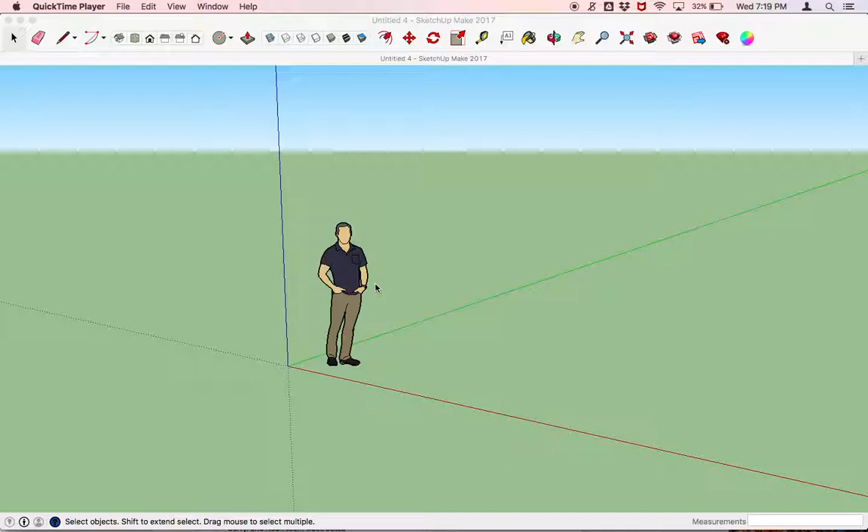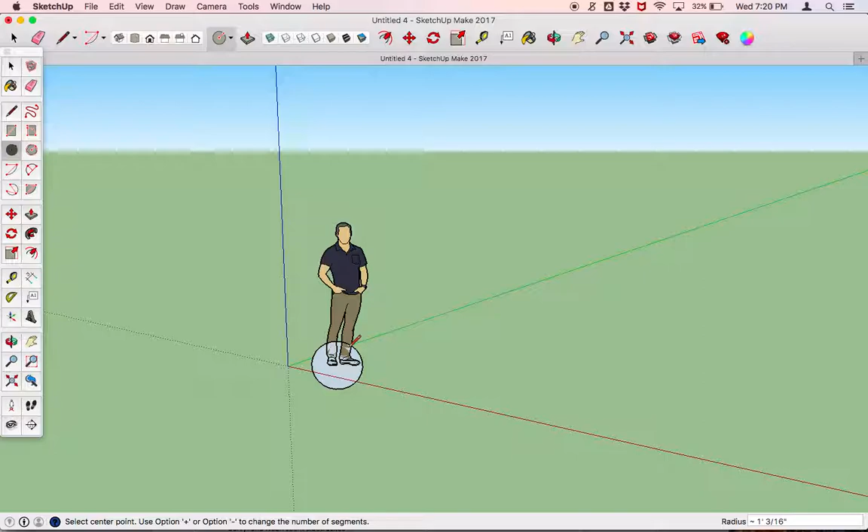To start, I'm going to press the C button to get the circle tool going. And we want to create this vertically, so I'm just going to click here vertically. And what you'll notice is that it gives you a radius down at the bottom right. And if we're thinking about the size of your project, you probably want the maximum radius to be about 5 inches. I'm just making random guesses here. And you'll see that that's pretty small. So I'm just actually going to select this away, and I'm just going to zoom way in on this.

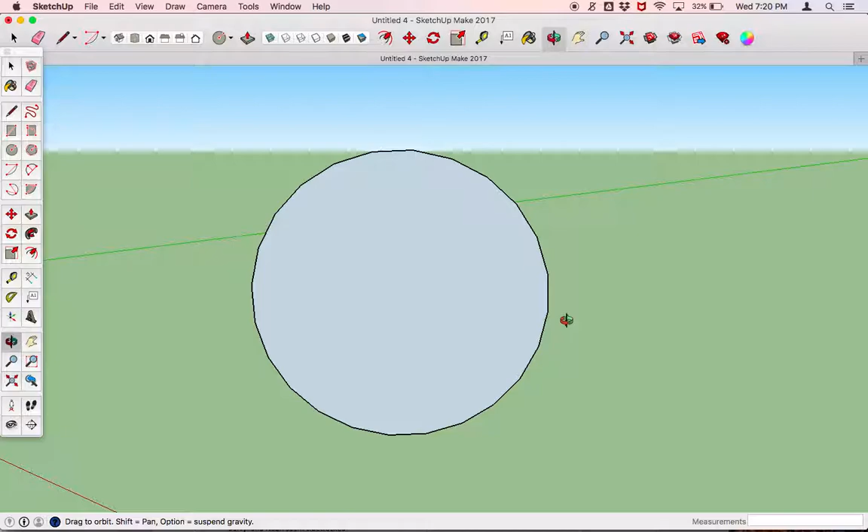So now we got this circle, and I want to push or pull it out a little bit. So let me orbit just a tad so that we can kind of see what we're doing. And I'm going to press the push-pull, and I'm going to start to pull it out here a certain amount. Now we don't want it too large. I'm thinking probably somewhere around 1/2 an inch is probably the most thickness that we want. We'll eventually duplicate this, but for now we'll just work on one of them.

Now you might remember that we use something called the offset tool, which is the F button. F as in Frank. We're going to push right here, just click one time. And the outer edge, I want it to be real thin, like a rail, basically. And so let's do 0.25 inches. You might have different dimensions already for this, but if I just call out that, you'll see what I get. And so you can augment those as you wish.

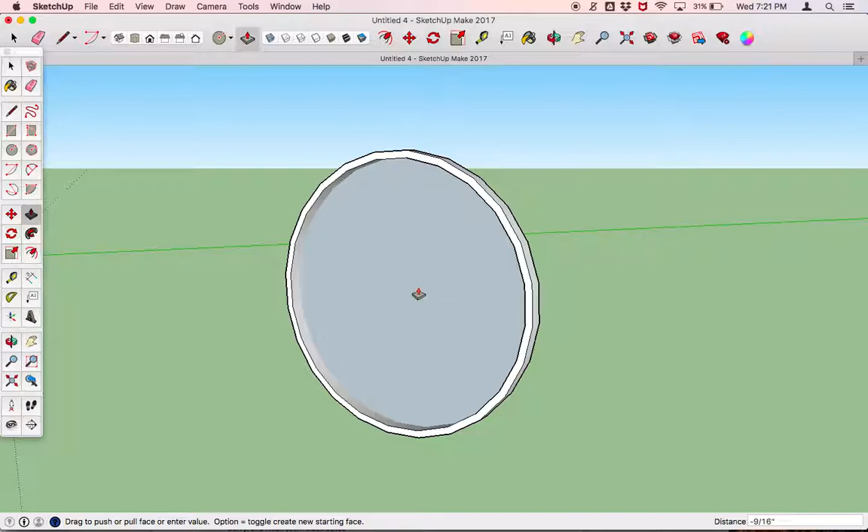You'll then use a push-pull tool again, remembering obviously, oh, sorry about that. I'll redo the offset. Yeah, okay. So the push-pull tool was just grabbing the outer edge, which wasn't what we wanted. But anyway, we'll push this through until we see it disappear. And so now you've got this rail.

And of course, if you wanted to, you could create this rail a little bit thinner. If you got to a point where you're like, yeah, I like it, but I just want to push it a little bit more, you could shave off a little bit. And so you see how that distance down there is negative. You can just push it a little bit more so that it gets a little bit thinner. That's totally fine. Shave off 3/16 of an inch from your original 1/2 inch, or shave off 1/4 inch from your original 1/2 inch, leaving you with 1/4 here.

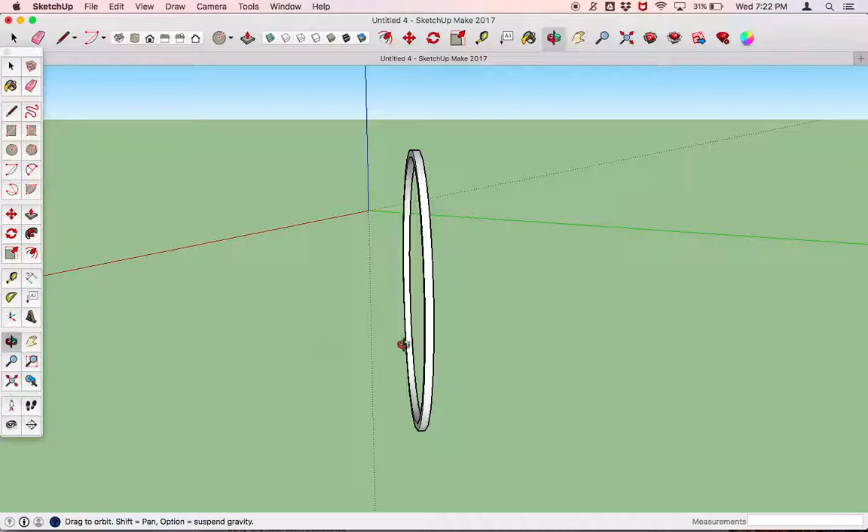So, okay, if we orbit around, now we can see that we've got this rail. We see at this point it's about 1/4 inch thick and 1/4 inch thick this way. And it has a 5 inch radius. So you might wonder, okay, Maggie, now what do we do? Well, the next thing to do, if you're going to make a Ferris wheel, obviously you've got to mount it on a base, and we can easily do that if we want to, but I kind of want to duplicate this, and so we'll use

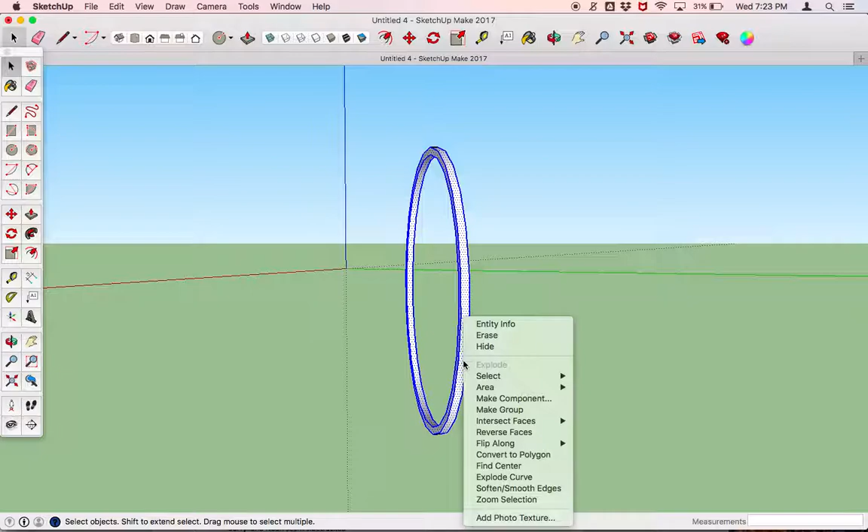this move tool, right? Ooh. And this actually got me thinking. We haven't grouped it yet, so let's group it. Like I said, this video is a little bit ad hoc. I didn't really rehearse. But now we have to right click. We're going to make a group. So now that baby's a group, and we can duplicate it easily.

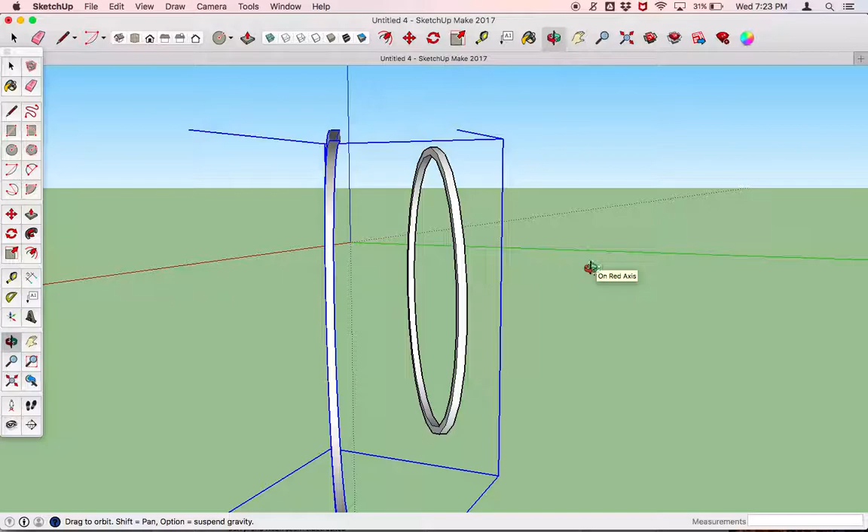So let's click it. Let's press the M button. Click it again. And then press Option. And that will move it. Right? Now, of course, we need to figure out where to move it. That looks decent, but of course, you're going to have to... Oh, oopsie. It did not like that. All right.

There we go. All right, something like that. And now, if I orbit around, we'll clearly see that these things aren't in line, and so we'll have to select one of them, right? And we'll have to move it using the M button until it's right in line with the other one.

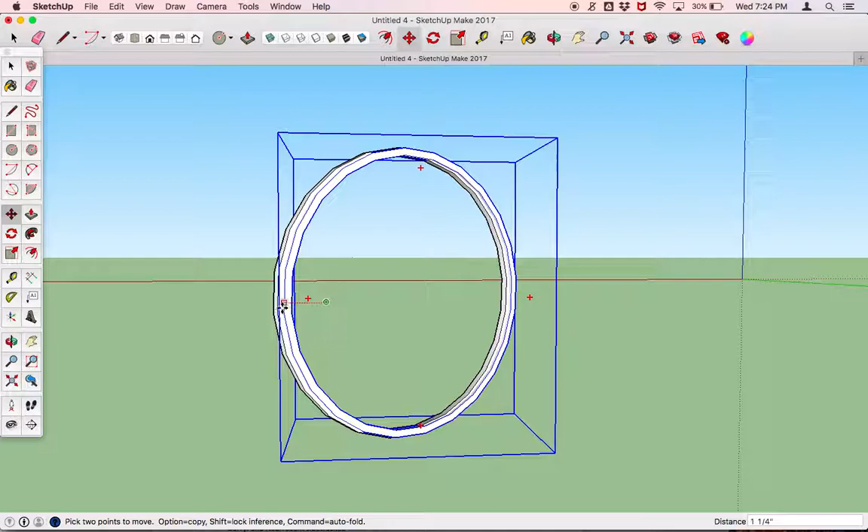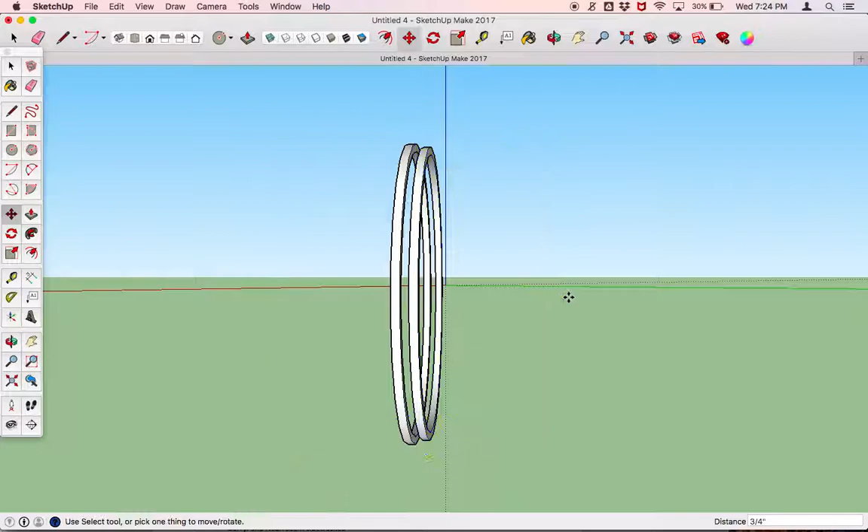And obviously we don't want it exactly on top of it. Right now it looks like it's exactly on top of it. So I'm just going to pull it out a little bit wider here. Yeah, it's definitely getting closer. But yeah, so you get the gist of how we're trying to do this.

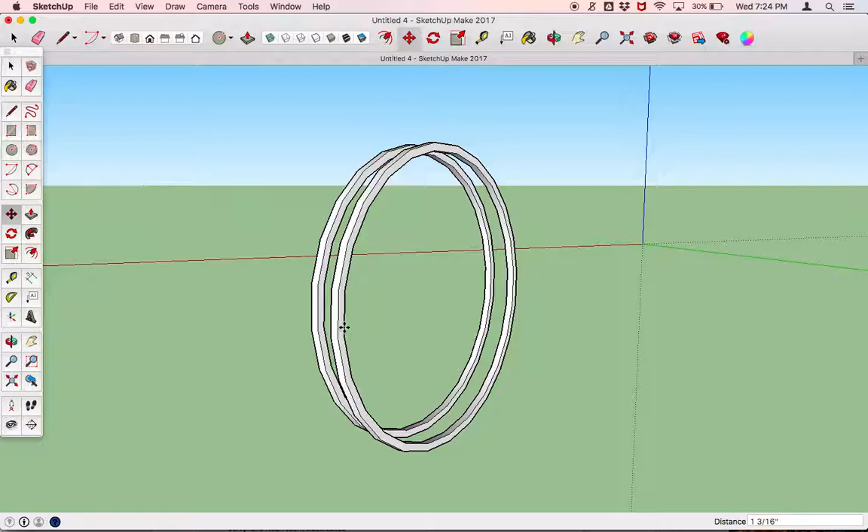This is a little bit of a tedious process. But generally, what we want is for these things eventually to sort of line up. And once they do, we can start to add some components. And I don't think I lined these up exactly right, but I could if I spent just a little more time on it.

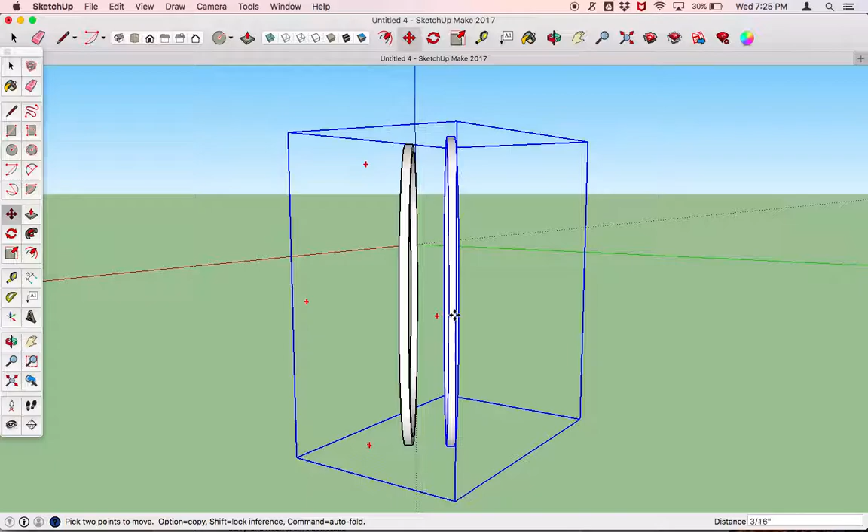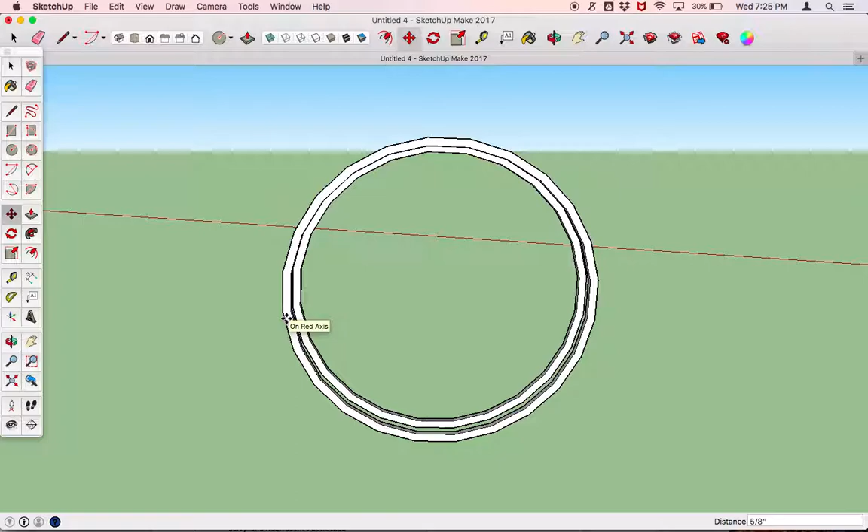And you can see that this one appears a little bit larger just because it's a little bit toward me. That's why, right? They're not different sizes or anything like that. All right, so something like that. Cool. So once this is sort of in order here, what we can start to do is zoom way in on this surface.

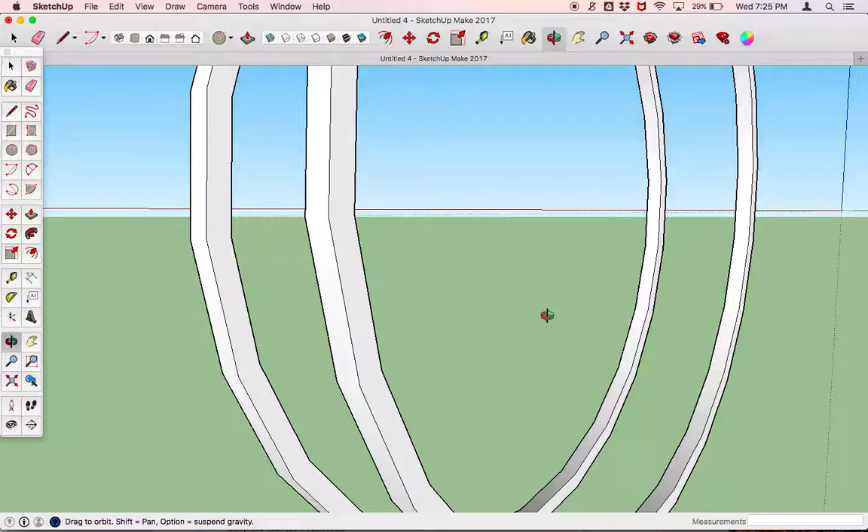And if we wanted to, we could start to create some lines here where we want to have the little boxes, or the little place that will come across. Or I don't actually really know what I'm talking about because I've never built a Ferris wheel before. But if I wanted to, I could basically build tiny little rectangles here. Here, I'll just do one example for you.

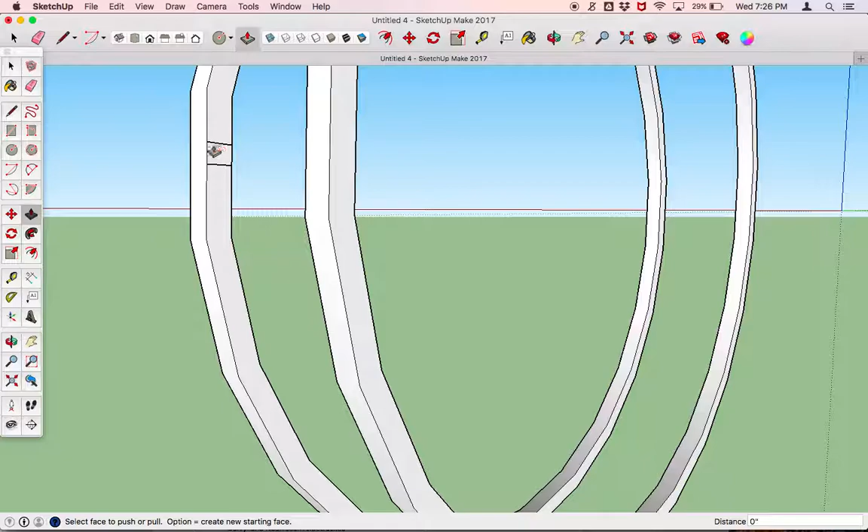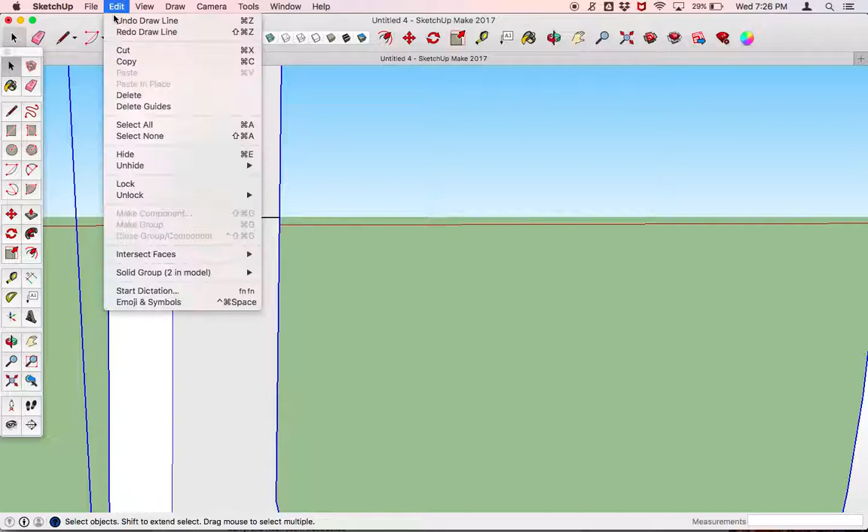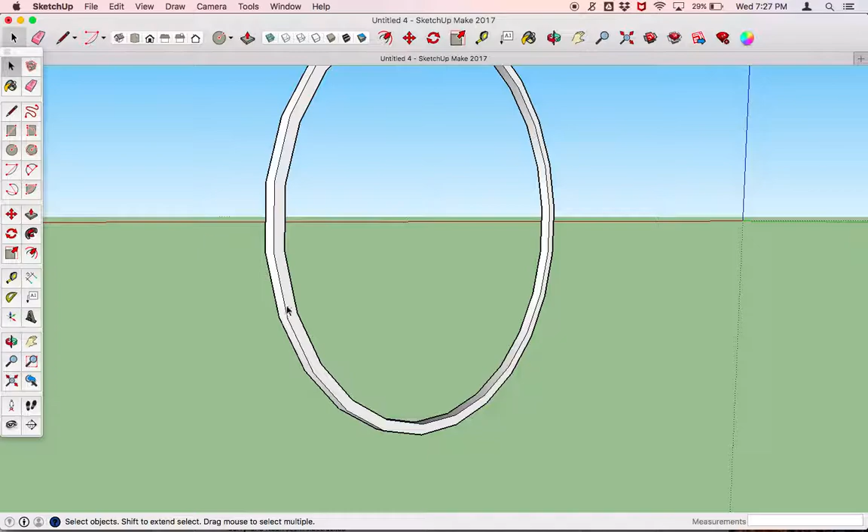And I could then push-pull it. Let me get a little closer. It's not liking that. Ah, okay. I think I have to ungroup it first. So let me do one quick thing, which is to hide this. And then I'm going to edit. All right, let's see if this works. Okay, so now it's allowing me to do that.

So like I said, not rehearsed, but what you're seeing here is that if I double click on the item once I've made it a group, it'll undo that group just so that I can work on it. And then you can pull this out to a certain amount. Let's say that we want this to be a full inch across. So we can put 1 inch like that and have it come off.

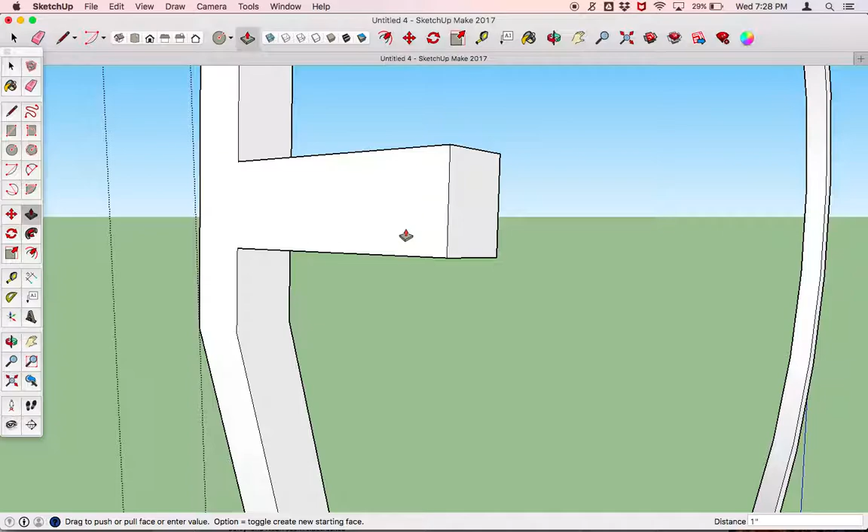And then what we can do is just continue to go around. The line tool is probably going to be what we want to use for that. So I'll create a couple more. And of course you'll measure these, but you want to have them be at regular intervals. Then you'd use the push-pull tool, extrude it out to 1 inch, right? And you do that basically all the way around. Let me do a few more just so that we can get a basic gist of what this is going to look like.

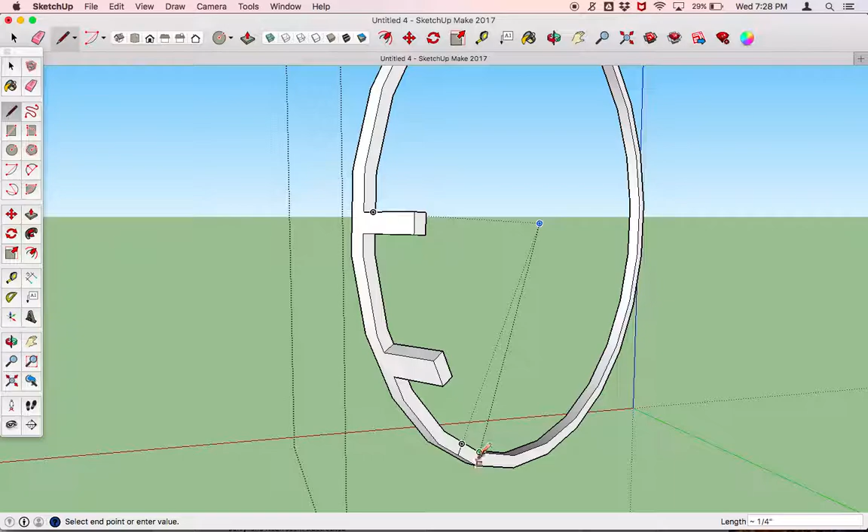Ooh, nope. Right, it'll be a little bit tougher on some of these just because of the angles. Give me just a minute. Okay. I am not doing a very good job of any sort of measuring whatsoever, but like I said, try to have your measurements be on point, but if the whole thing looks different at the end, it's really okay. Just try to have something that is pretty accurate in terms of the measurement.

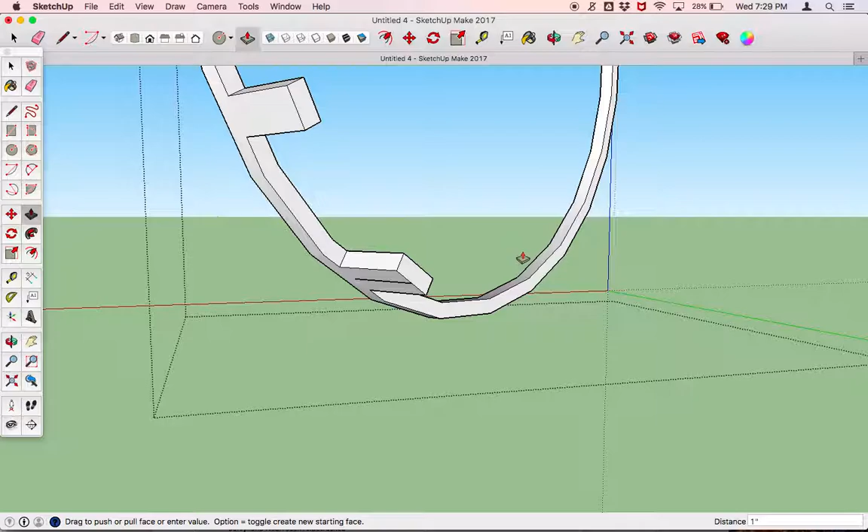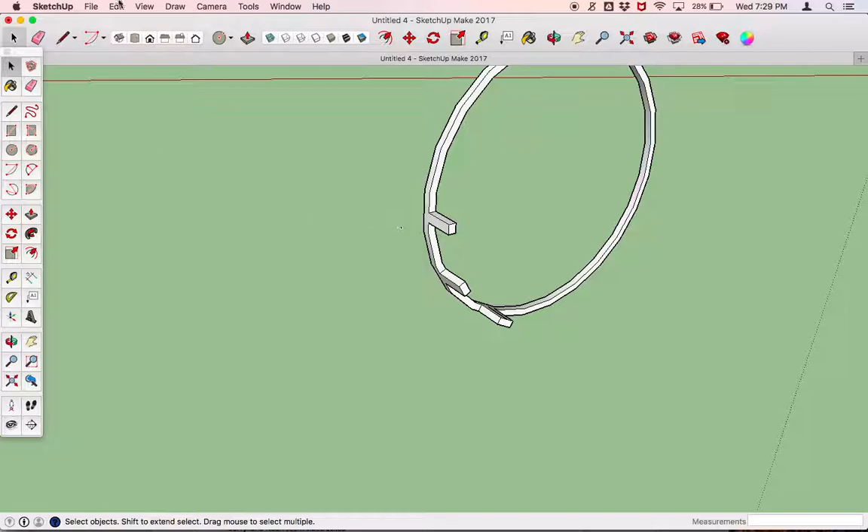Okay, then we're going to orbit around again. All right, at this point, I'm going to pause this whole operation. First I've got to select out of this, and then I'm going to do Edit, Unhide All, and that should come back. Obviously now at this point, we're going to have to move this baby so that it matches up.